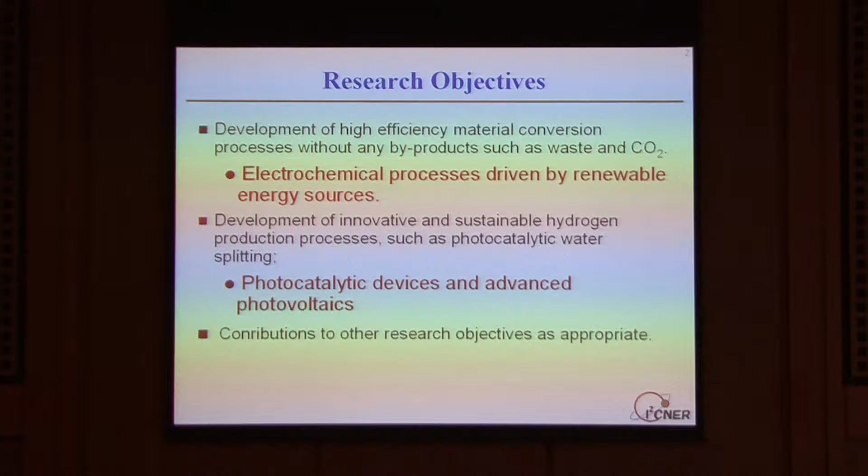In addition, we want to look at ways of hydrogen production, photocatalysis, and that sort of thing. All of these processes require energy input in the form of electrons at high chemical potential, and so that's what a photovoltaic provides. The people that I'll be mentioning today can also contribute in many other areas that you've heard about today, so it's a potential for a lot of collaboration.

In terms of driving photocatalysis, an excellent way to provide electrons at high chemical potential is with a photovoltaic device. In particular, one might imagine a multi-junction photovoltaic. You heard a little bit about that earlier with the two-stage optical absorption, the high-energy photon followed by a low-energy photon absorption. That's typical of a multi-junction photovoltaic where you have a blue absorbing solar cell that's transparent to red light. You put behind it a red absorbing solar cell, and then you put them in series.

It adds the potential of the two cells, and so you get a higher potential out of the whole device. The nice thing about a multi-junction cell is that you can tailor the energy gaps for very high efficiency. The record efficiency for a photovoltaic device is 40% efficient conversion of sunlight to electrical energy. By tailoring the energy gaps and the way that you put those devices together, you can also tailor the net potential that you develop from the anode to the cathode of the multi-junction device. So you can adjust the way that you design the device in great detail for optimized performance with respect to an electrolyzing device.

And then, of course, you need the electrolyzer, which will be discussed in the talk that follows mine. Photovoltaic devices provide sufficient output to split water directly. They're very high efficiency, as I just said. One of the things that you certainly have to worry about is protection of the device from photochemical corrosion in the material, and so one of the big issues will certainly be some sort of a barrier between the device and the electrochemical cell.

It would be interesting to look at things like the nitrides as polycrystals and see if you could adjust the deposition conditions and composition of the materials to passivate grain boundaries in that material system. They're much less susceptible to grain boundary behaviors than the less ionic arsenides, and of course the covalent materials.

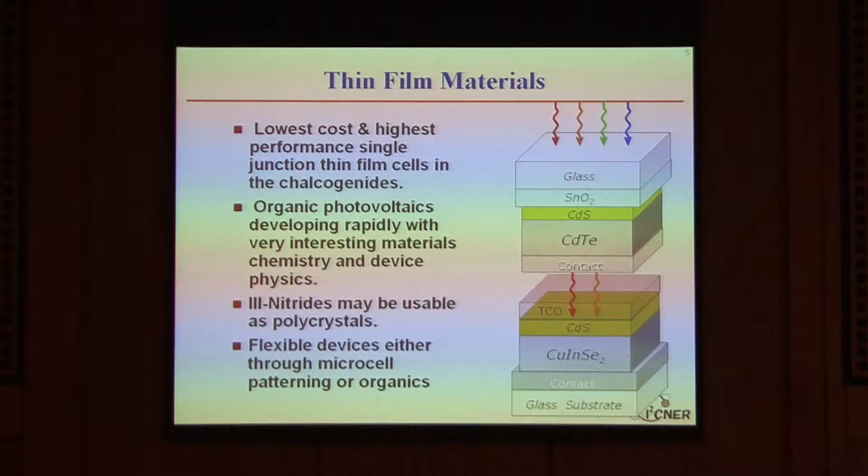Flexible devices are nice for many applications, and you can do this either by using organics, or you could consider, for example, a patterned microcell process such as one of my colleagues, John Rogers, uses, and I'll mention that in more detail in a minute.

So just to consider a few examples of the work that's going on at Illinois, and perhaps you can see as I talk about these how they fit with the work going on here, and how we can make a collaborative team out of the whole structure.

This is a summary of Lane Martin's work in my department. He's working on oxide materials, ferroelectric materials. He's got a radically new concept, I think, for a photovoltaic device, where instead of relying on a heterojunction to separate an electron from a hole, he relies on a polarized ferroelectric material and takes advantage of that built-in polarization to separate the electron from the hole. He can make devices that work, and he's exploring this concept.

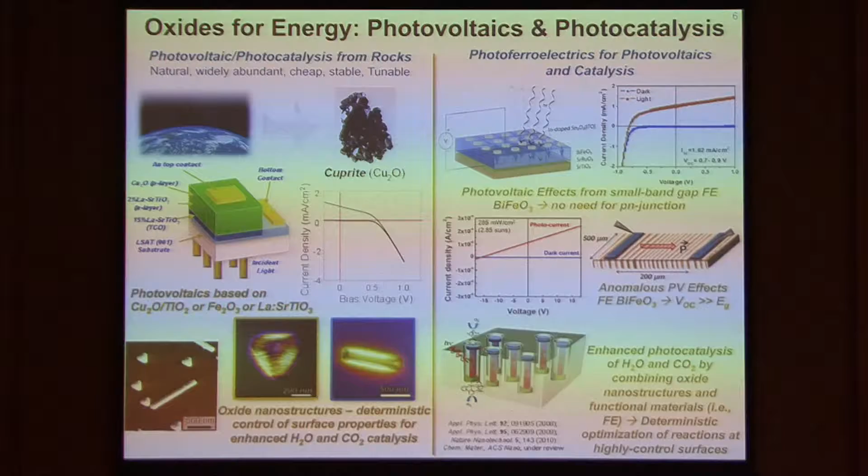One can imagine then going on. These are relatively stable compounds, being oxides, for electrochemical corrosion, and so you could imagine very interesting new novel devices made out of these things. He's making photovoltaic materials as well from the copper oxides, which have been studied for a while, but they're coming back into fashion, and people are looking at new technologies based on the copper oxides.

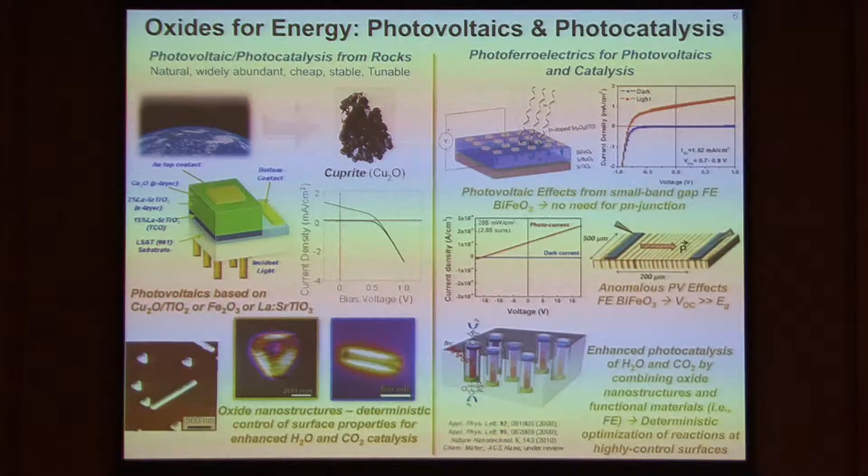I think in particular his work is very exciting, the combination of the copper oxide with things like titanium or iron oxide, or some of the perovskites like lanthanum strontium titanate. So these are exciting opportunities in an inorganic device.

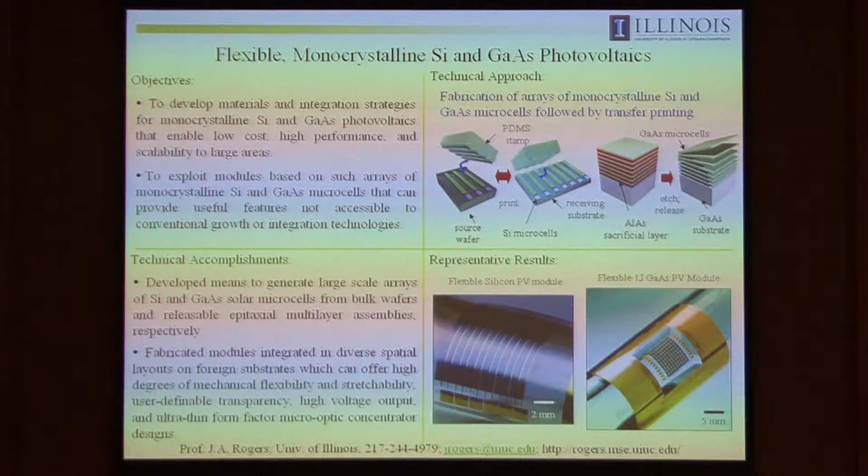My colleague John Rogers, in the same department as I am, material science, is spending a lot of his effort on micro-patterning of solar cells. He has developed technologies by which he can take a high-efficiency device, like a silicon device or a gallium arsenide device, that's normally very hard to process and requires a relatively thick substrate.

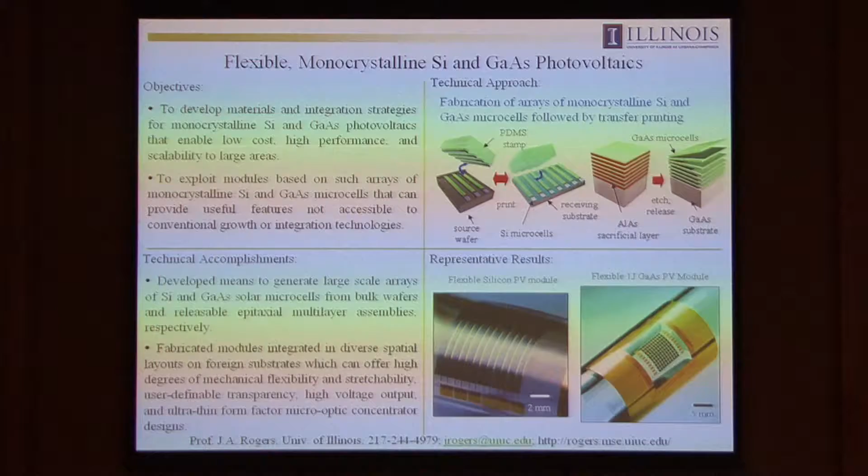And he's found ways of cleaving off thin layers of that material, picking it up, placing it somewhere else, and therefore cutting down greatly on the amount of material used, making a flexible device. This has a lot of applications, both in flexible photovoltaics, but also in much more effective utilization of things like gallium arsenide, with potential to revolutionize the manufacturability and deployment of arsenide-based solar cells. This is the 40% efficient technology.

That's really exciting, something that we can use, again, to drive an electrochemical cell directly.

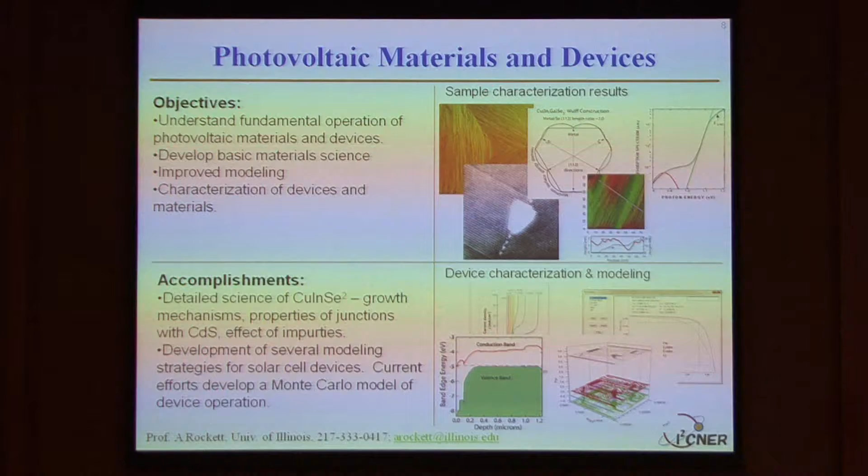There isn't a good model for organic photovoltaics at the moment, or for nanostructured photovoltaics. The model we're developing, based on a two-dimensional grid system and a stochastic model, can handle the very low carrier mobilities and the time-critical series of events in a nanostructured device, especially a multi-exciton or intermediate bandgap structure. So we can provide both modeling and characterization along with inorganic materials and devices.

The University of Illinois, as a collaborator in this project, has a very extensive range of characterization facilities, all the way from optical probes, SIMS instruments, surface scanning probes, and we would love to work with the groups here in terms of supplying material to us, characterizing it, and feeding back to the groups here that are making devices.

When you think about turning this into an artificial photosynthesis process, this is how I view it: you need, in order to make the completed device, to integrate a lot of parts together. You could imagine saying, okay, we need to make a photovoltaic device - that could be organic or inorganic-based, or a little of both. We need an electrochemical cell to go along with it. We need device modeling and simulation to figure out how the rest of the process worked. We need to characterize the materials we make so we know why the device works or doesn't work. And then ultimately we can put it all together and make a completed device.

So in terms of how I perceive a collaboration between Illinois and Kyushu, the work here involves particularly organic materials and devices. At Illinois, we're mostly working on inorganic materials and devices. There's electrochemistry at both organizations, and characterization techniques at both organizations. Most of these are synergistic and complementary, so we can build a team together that I think really will advance the technology, drive this forward, and result in direct photoelectrochemical production of hydrogen.

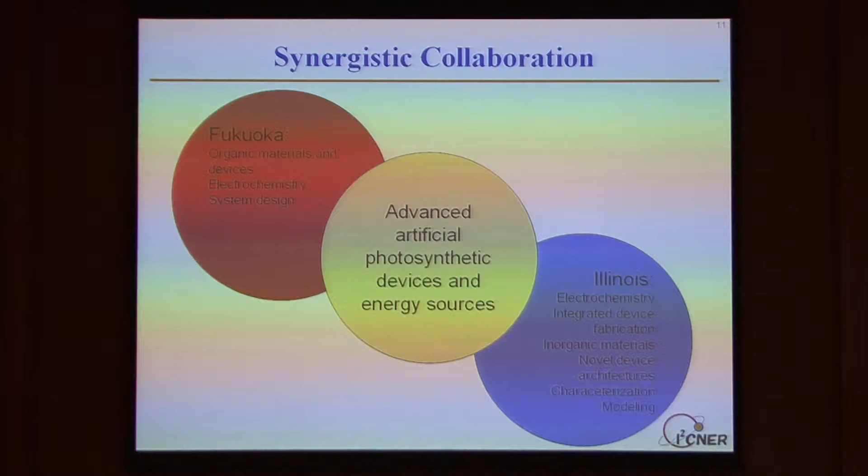Finally, as a vision for the future, one comment I like to make is the best hydrogen storage material I've ever run across is long-chain hydrocarbons. We know, as you've heard from the talks earlier, that we can do electrochemical reduction of carbon dioxide, and in fact you've seen evidence that we can put these two processes into a single electrochemical cell that yields syngas directly in the high-temperature steam reformer, and go directly through Fischer-Tropsch to a long-chain hydrocarbon. So we know we've got all the pieces to go from sunlight or wind or any other form of energy to hydrocarbon hydrogen storage technologies, and we know how to use that in our vehicles today.

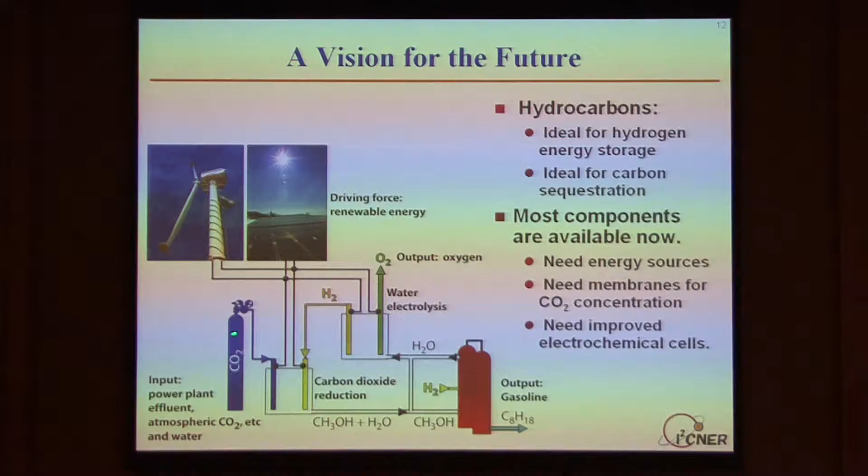So I think really what we're faced with is taking and optimizing all of these little process steps, not the least of which is gathering carbon dioxide from the atmosphere. But we can do all of these parts - we just need to do them better. And then we can store energy in the form of hydrocarbons, which we already know is a fabulous energy storage technology. So with that, I thank you for your attention.

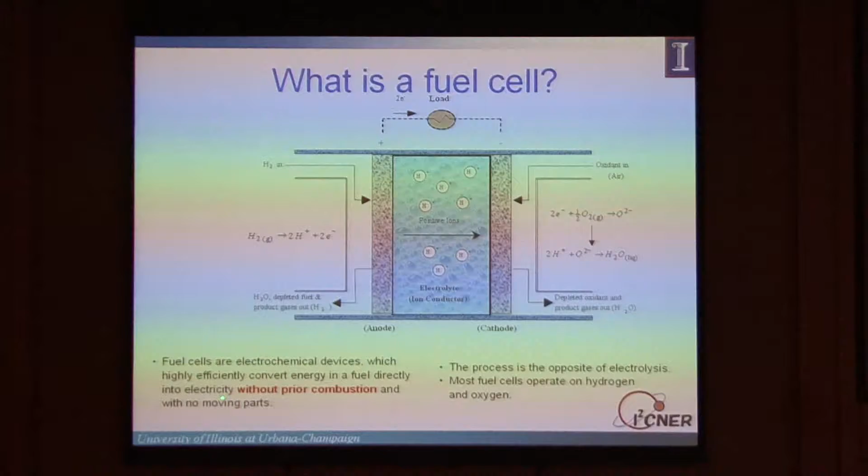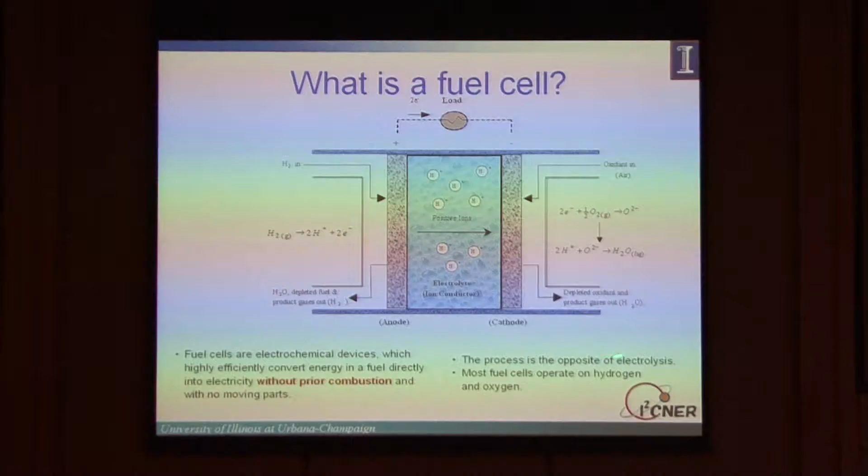Okay, so why use a fuel cell? Well, it's a very efficient electrochemical device. We can turn a fuel directly into electricity without prior combustion and with no moving parts. And as has been mentioned several times today already, this process is the opposite of electrolysis, and we're going to run on hydrogen and oxygen.

This was the component in Apollo 13 that blew up, if you might remember.

All right, the ones we're going to work on are either these PEM fuel cells, which work on hydrogen and are CO2 tolerant, or direct methanol fuel cells, which are a little less popular these days. And then we've also heard some talks today about solid oxide fuel cells. But there are other types, phosphoric acid fuel cells and molten carbonate fuel cells, and these have sort of fallen out of favor these days, although they could come back.

And the areas of application for these, as we saw, range from things like portable electronic equipment to mobile and residential generation to cars and boats — and this is where PEM fuel cells in particular are being talked about — and to distributed power generation, and this is perhaps where a solid oxide fuel cell would be best used.

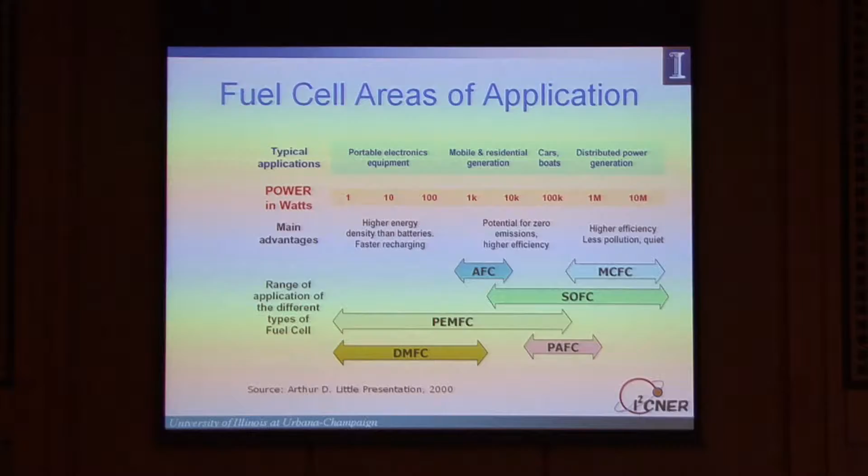Now, the main advantage of the fuel cell — and this is the very important point — is the high thermodynamic efficiency. I can take hydrogen and oxygen, and figure out a way of getting power out of it by simply combining them and flicking a lighter, and presto, you get combustion. But then, of course, you're Carnot cycle limited, and hydrogen is a low temperature burning material, so that Carnot cycle limitation basically means you're not thermodynamically very efficient.

In contrast, this is a chart I took out of Physics Today — it was an article about 10 years ago — showing we can have very high thermodynamic efficiencies with all of these different fuels. You can see right here, after you include the entropic term, we can have thermodynamic efficiencies up to in the mid-80s for hydrogen, and ranging to over 100% because of the entropic term.

We're not creating energy out of nothing. Compared to an internal combustion engine, we have very high efficiencies — the best known way to convert chemical energy of fuel into electricity. A typical Otto cycle engine has thermodynamic efficiencies in the mid-20s, and the best diesel to date only attains about 40%. So it's actually fairly low.

Compared to a battery, we have significantly greater energy density, and it's much faster to recharge or refill.

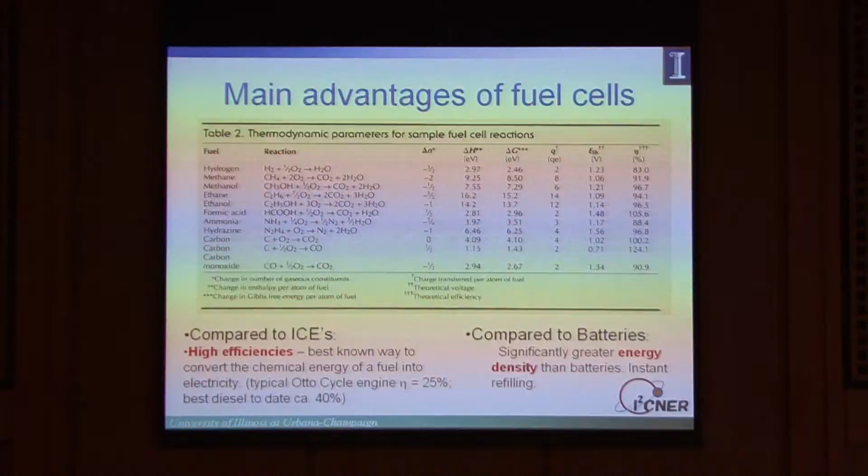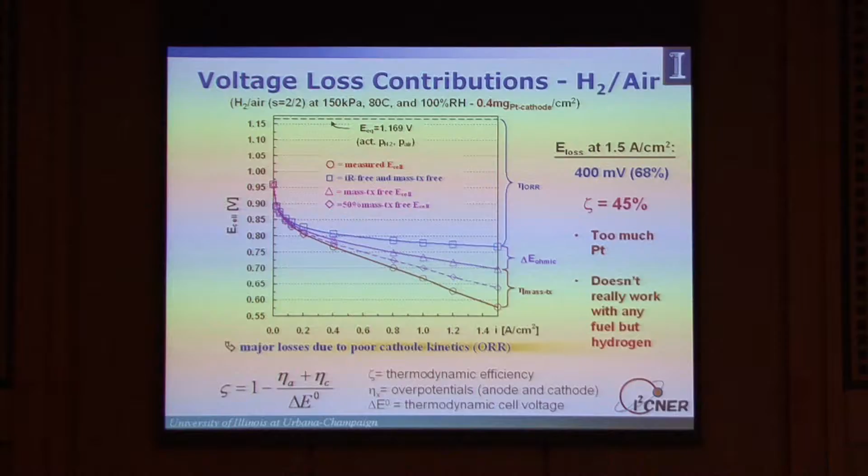Okay, so what we want to do is we want to step back. We want to understand what the mechanism of this oxygen reduction reaction is. And then what we want to do is use this mechanistic understanding to develop a new catalyst that will solve all of our problems and move us on to greater glory.

Okay, so let's see. What do we know about the mechanism of the oxygen reduction reaction? Well, it turns out not too much. This is work by a very smart American electrochemist named Ernie Yeager some years ago. And Yeager, who did not use molecular-based tools, was smart enough to know what he didn't know.

But he proposed perhaps there are 2 platinum sites involved. He couldn't tell whether it was end-on or side-on, what the intermediates were. And let's just say that this was a good guess. So don't copy this down. Please don't. All right, now, so this leads to a whole series of questions.

What's the mechanism of the oxygen reduction reaction on platinum and with other catalysts? What are the intermediates in these reactions? How can we replace platinum with less expensive materials at both the anode and the cathode? How can we reduce the overpotential, which is telling you what's killing you thermodynamically?

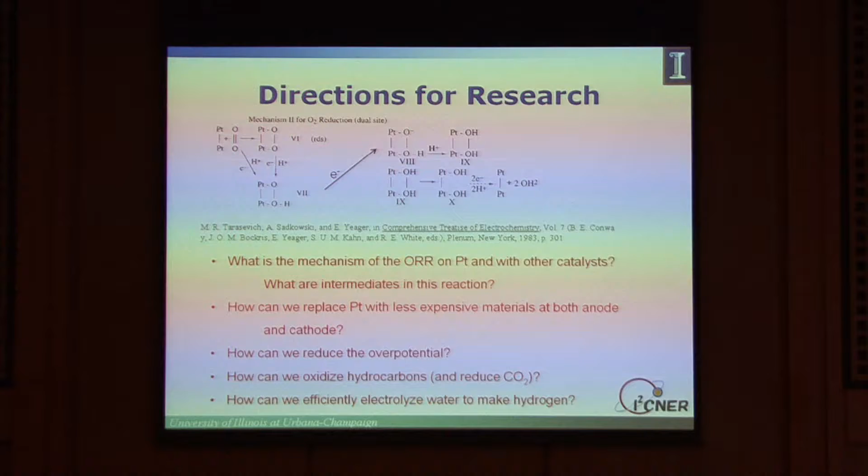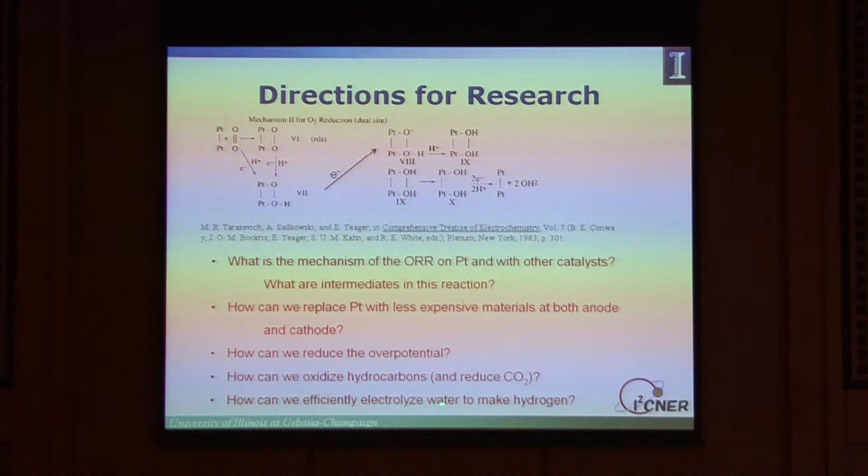How can we oxidize other hydrocarbons? So I think Angus pointed out that storing hydrogen in a hydrocarbon is actually much more efficient than storing it in a hydrogen tank, all right? And reduce CO2. And how can we efficiently electrolyze water to make hydrogen? So all of these things are what we need to do in order to make this work properly. And so I'm going to very quickly just go through some of the things that we've done in this way.

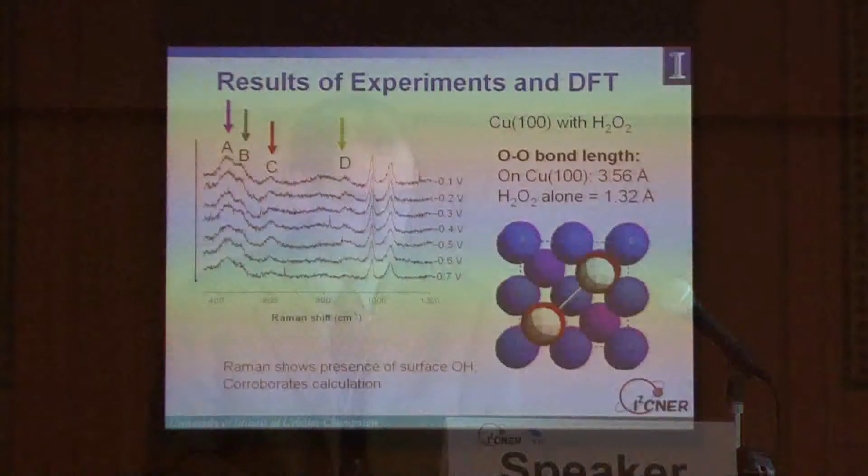Okay, so we've done a lot of mechanistic work. We do vibrational spectroscopy. We do calculations. And I will say that all the work we do show the presence of surface hydroxides, which we believe come from this cleavage at the peroxide level.

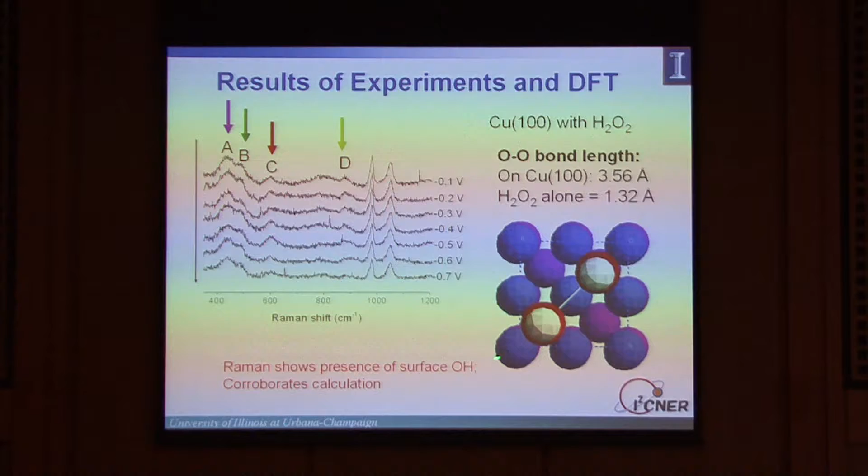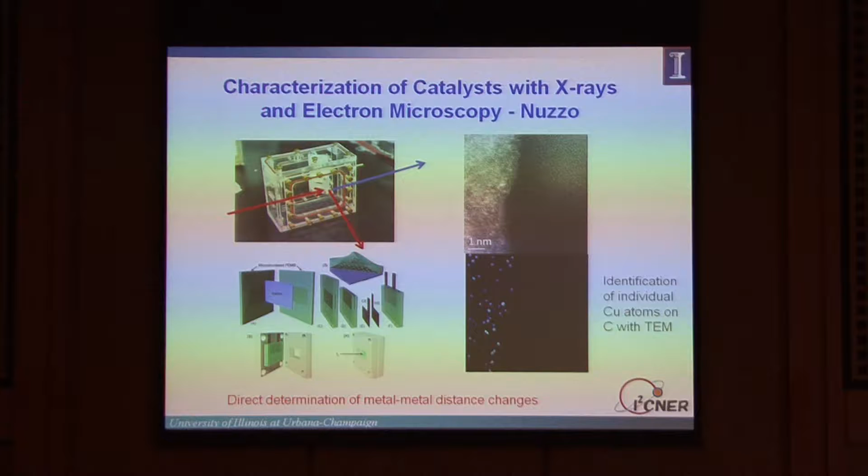All right, don't take notes because we've done X-ray scattering experiments to look at platinum-platinum distances as a function of oxygen presence and of potential. We can do TEM to look at real catalysts on surfaces. These are individual copper atoms on a carbon electrode surface. And from this, we can come up with a series of mechanistic ideas.

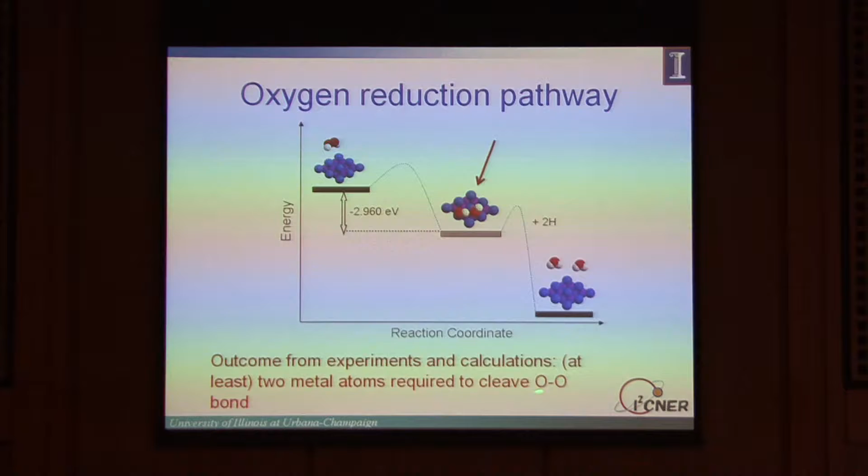And the outcome from all of these experiments and calculations is to show that at least 2 metal atoms are required to cleave the oxygen-oxygen bond. So that's one thing that we know we want to do.

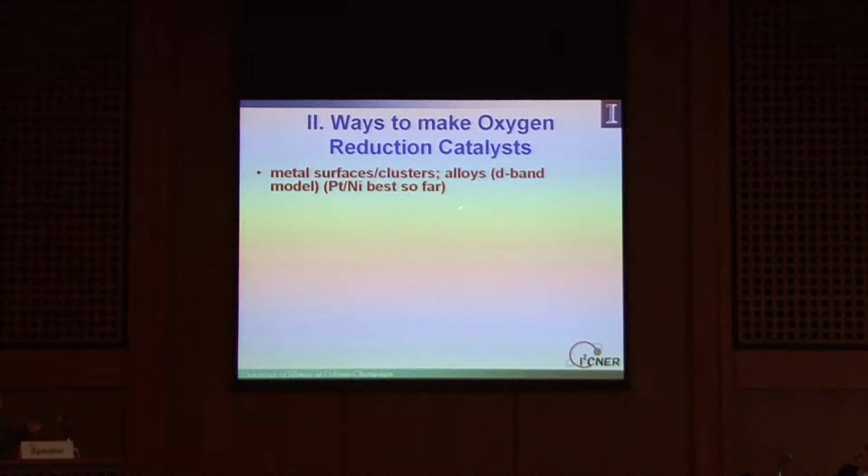Okay, so with this idea, how can we make new oxygen reduction reaction catalysts? Several ways. One way is by making metal surfaces or clusters or using alloys. The so-called D-band model, which is a consequence of something called the principle of Sabatier, important in catalysis, is often used. Platinum nickel is the best so far.

We can heat treat carbons. All right, there's a lot of work this way. Dodolet is perhaps the most known for this. You can pyrolyze a carbon at 850 C and actually get something that works fairly well if you include a metal.

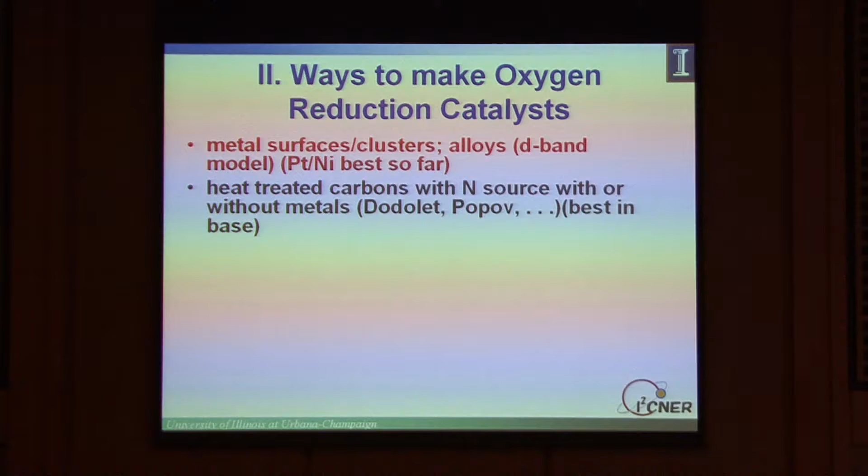You can make other polymers with metals. Cobalt polypyrrole is the best exemplar right here. You can do combinatorics with all of these, but we won't talk about that. You can work in the basic electrochemical environment, forbidden here on Earth because of the formation of carbonates in the electrolyte, which lower your conductivity. But things like the zinc air battery or gold in base work fairly well. We don't fully understand why.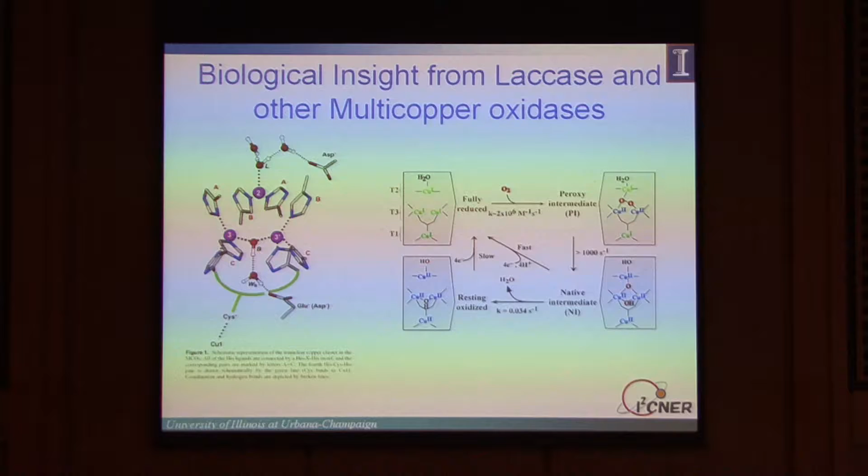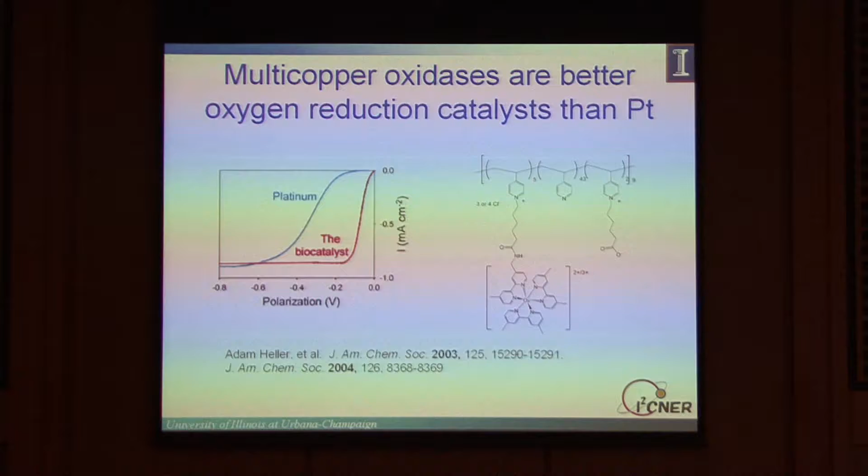Finally, we can look to what nature tells us, and it's this point I want to emphasize. It turns out nature has solved the oxygen reduction reaction problem. In fact, right out there on the ground, there's an enzyme called laccase, which reduces oxygen at near thermodynamic potentials, and uses that energy to oxidize various things. What it features is a 3-copper active site, and a series of intermediates not dissimilar from what I glanced over before. The interesting thing is many people have shown this catalytic material is substantially better than platinum. So all we have to do is figure out how nature did it, and then we're better than platinum, and we solve this problem.

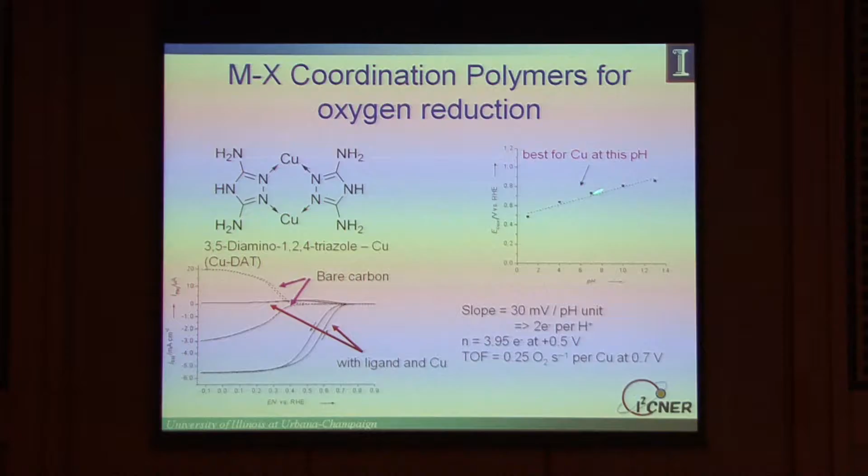We've done some of that. We have a material based on this 3,5-diamino-1,2,4-triazole, which forms a binuclear copper site. We've shown that this catalyst is the best catalyst for copper at intermediate and higher pHs. We've been spending a lot of time working on that.

At the same time, my colleague Tom Rauchfuss has been working on the anode reaction—recall that's where you're oxidizing hydrogen. He has a biomimetic catalyst based on these iron-nickel hydrogenases. He's shown that he can get very efficient oxidation of hydrogen with only a small overpotential. In fact, the best overpotential for hydrogen on this material.

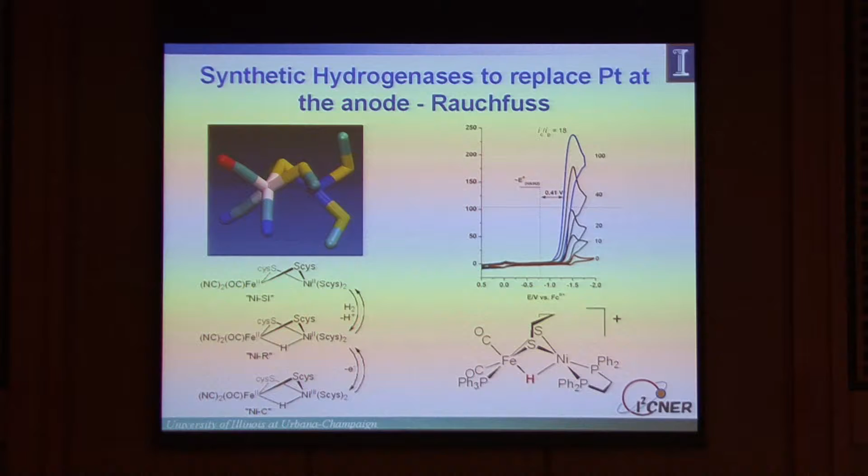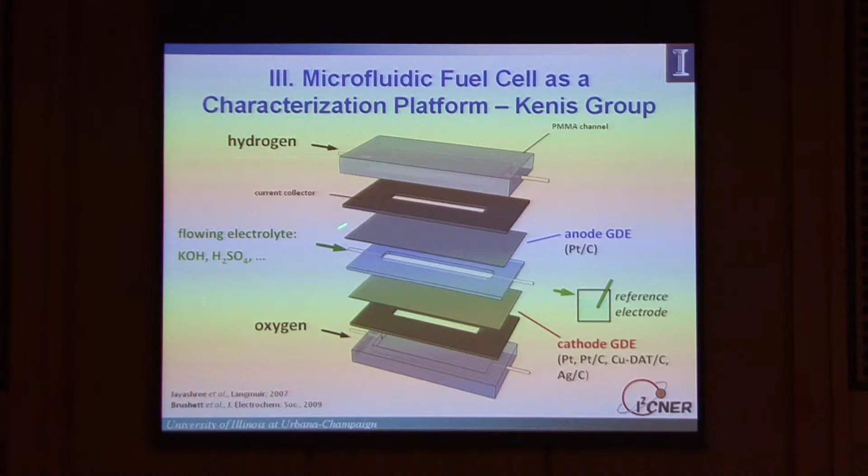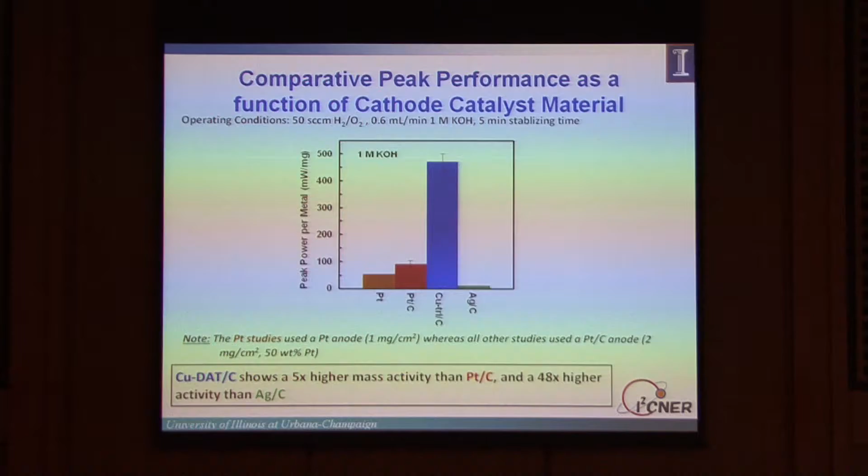So now what we can do is test these materials using a microfluidic platform developed by my colleague Paul Kenis. He can do both the hydrogen side and the oxygen side simultaneously with a reference electrode, and he has tested our diaminotriazole catalyst. What he's shown is that in base, this catalyst is about 5 times better, or 5 times higher mass activity, than platinum-carbon material, and better than the more traditional silver-carbon material that was used, for example, in the alkaline fuel cell in the Apollo program.

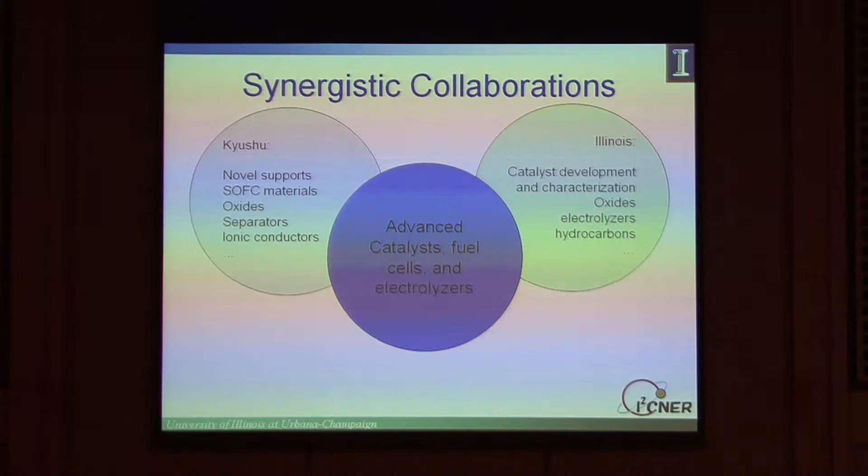So with this one example, I can give you some ideas of the kinds of synergistic collaborations we might engage in between Kyushu University and the University of Illinois. Here we've seen talks about novel supports, solid oxide fuel cell materials, oxides, separators, and ionic conductors. At Illinois, I think we're fairly good in catalyst development and characterization, in oxides, in electrolyzers, and in work looking at oxidation of hydrocarbons. Taken together, I think what we can do is make advanced catalysts, advanced fuel cells, and advanced electrolyzers.

I'd like to close with a final thought: this is a great time to be involved in electrochemical work because it is charge transfer at interfaces. I think that's the major theme we've seen in all of this work. Charge transfer at interfaces is what's going to make us have a better energy future. Thank you very much.

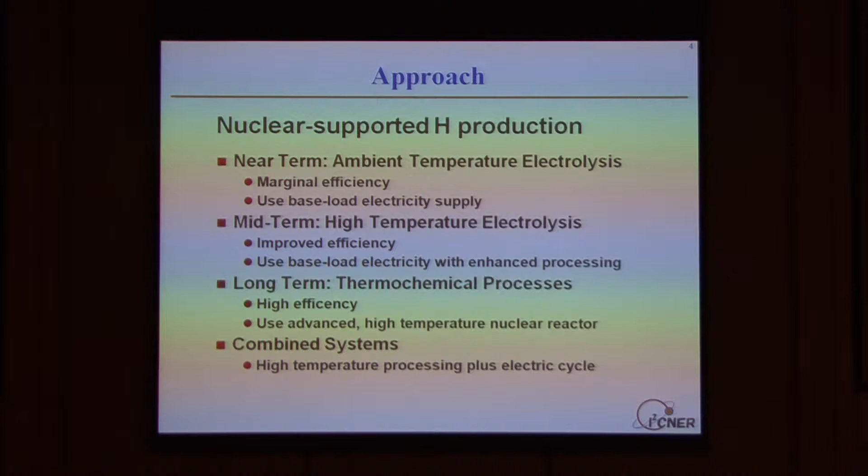And so I think this is the goal of nuclear. It's the goal also of several forms of renewables, particularly hydroelectricity and other things. And I think nuclear has a place to play in this area right now. So the very near-term things that nuclear can do, we heard about, are providing electricity for doing ambient or lower temperature electrolysis. Medium term, we can go to higher temperature electrolysis, which improves efficiency, as we heard earlier. And then longer term, though this is ongoing now, there are a number of thermochemical processes, one in particular, which are being developed to do much higher efficiency conversion of water or splitting of water into hydrogen and oxygen. And there are some very long-term goals, which I'll remind you of. These are concepts that were here 10 years ago, at least at the end.

And so this gives you an idea about where the primary sources are. Again, this is like the first chart. You'll notice that, again, these are the primary sources in the U.S. The first primary source in terms of quads produced that's non-fossil is nuclear. And this is a very large fraction. If you add all of these things together, this accounts for roughly 70% of the U.S. energy production. So this is the indigenous energy portfolio of the U.S.

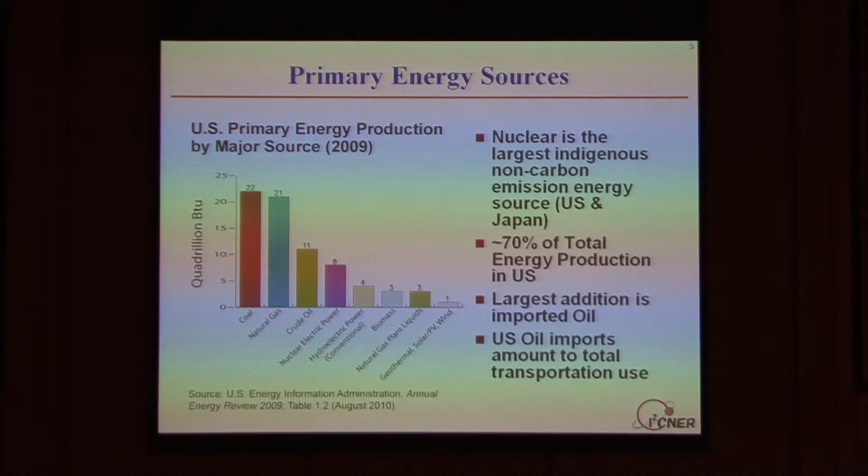The other 30% is imported, and that roughly corresponds to the transportation costs for energy. So about 25 to 30% of the energy used in the U.S. is for transportation. If you look at oil imports, that's essentially all the oil we import. If we had no transportation sector, we'd have very little need to import oil. Alternately, all of the imported oil supports the transportation sector.

Looking at where carbon is produced and where the major footprints are, this is a very recent report done by CRIEPI here in Japan, dated 2009. It shows fuel combustion, carbon emission, and the life cycle of building the infrastructure for those energy systems. You can see coal, oil, liquefied natural gas, all the way down to nuclear, geothermal, and hydro are the least energy or carbon intensive of any of the energies. This is true for nuclear because it's a lot of energy for very little carbon footprint in the construction process.

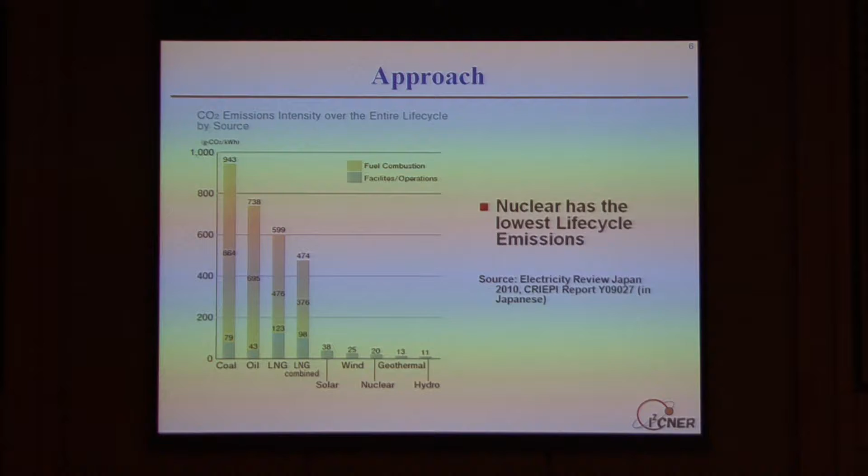So this makes a strong case that nuclear should be a big part of the solution. Another strength of nuclear is base load electricity production. Here's a schematic chart, taken from the Japan Electricity Review from last year. Coal and nuclear, particularly hydroelectricity, are very good for base loading. People often handle peak loading with more easily burnable hydrocarbons, particularly natural gas in the U.S.

This shows electricity prices on a hot day in August in the U.S. and on a cold day just a month ago—so the start of this year, 2011, not 2001. The peak load in summer is very high, so there's excess capacity in winter when loads aren't nearly as high. This is Chicago, which is 80% nuclear electric. Notice that on this cold day, if you got up early enough or stayed up late enough, the company would actually pay you to take electricity from them—there are negative prices here, and this isn't uncommon in this scenario.

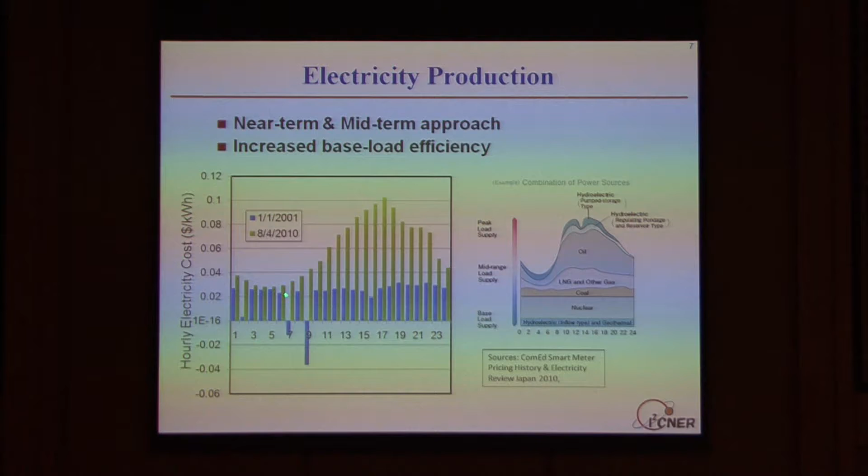Because when you have mainly baseload power, you have to get rid of excess electricity—it's more costly to turn plants up and down than to just give the energy away. I think this makes a good argument for using this differential capacity, as well as the late night, early morning low-priced electricity, to manufacture hydrogen.

This is a comparison of 2008 figures and projections for 2013 and 2018 for Japan's electric production. The nuclear fraction is proposed to increase significantly, from around 26% to maybe 40%. I've replotted these numbers here—Japan 2018 alongside Illinois in 2009, last year—and you see that even Illinois is half nuclear electric.

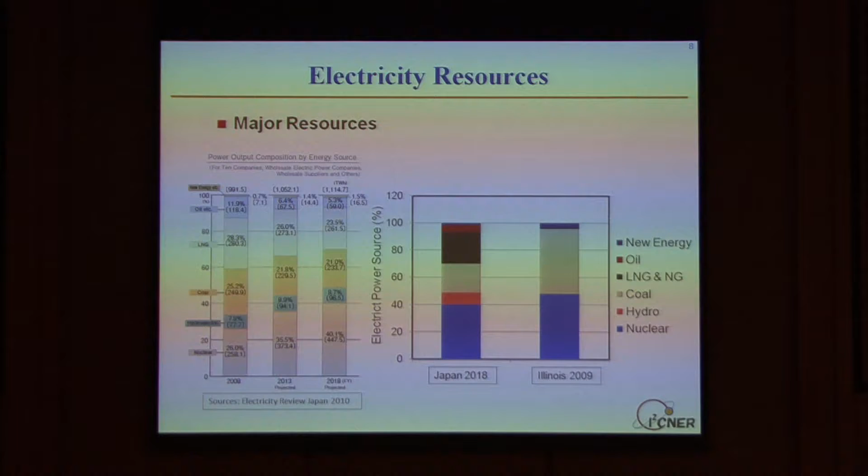This makes a strong case for major support of hydrogen production using, at least in the near term, electrolysis from nuclear energy. The next step, which is evolving both in Japan and the U.S., is to look at a much higher temperature system where you could do thermochemical processing to produce hydrogen much more efficiently.

This is a conceptual picture of what is now called in the US the next generation nuclear plant. It's a very high temperature gas-cooled reactor connected to an electric supply system as well as, in this case, a couple of thermochemical supply systems.

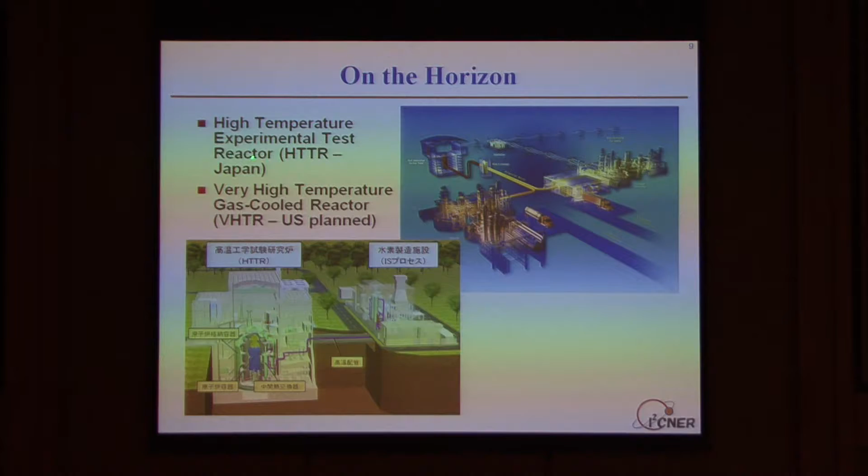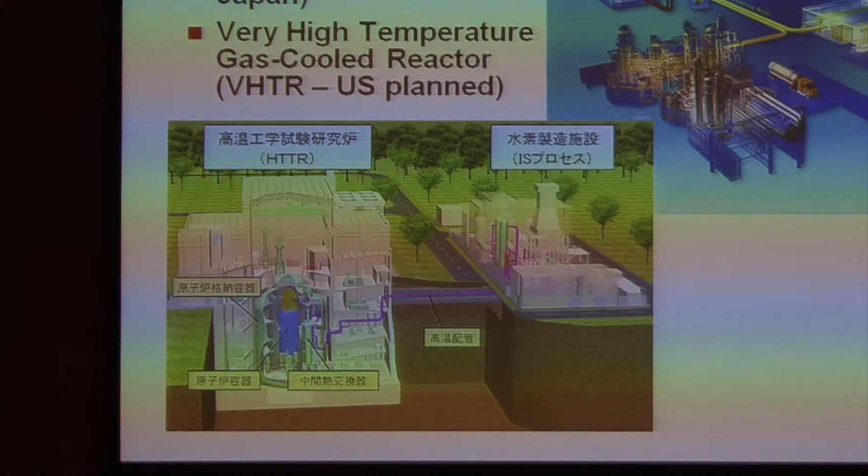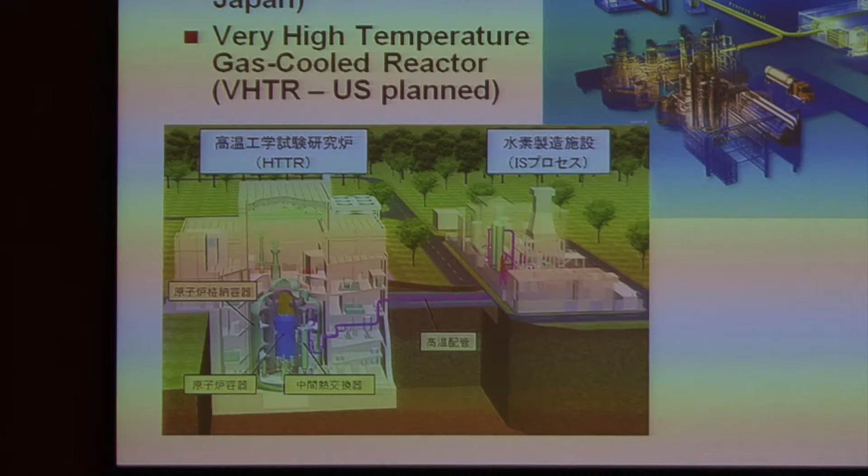This is an existing reactor in Japan, the High Temperature Engineering Test Reactor, HTTR for short, which is currently in the process of building a thermochemical processing plant for hydrogen production. This particular reactor reached an outlet temperature of 950°C six or seven years ago. So it has been operating at a high enough temperature to enable very high temperature electrolysis or to drive thermochemical reactions, and this has already been done.

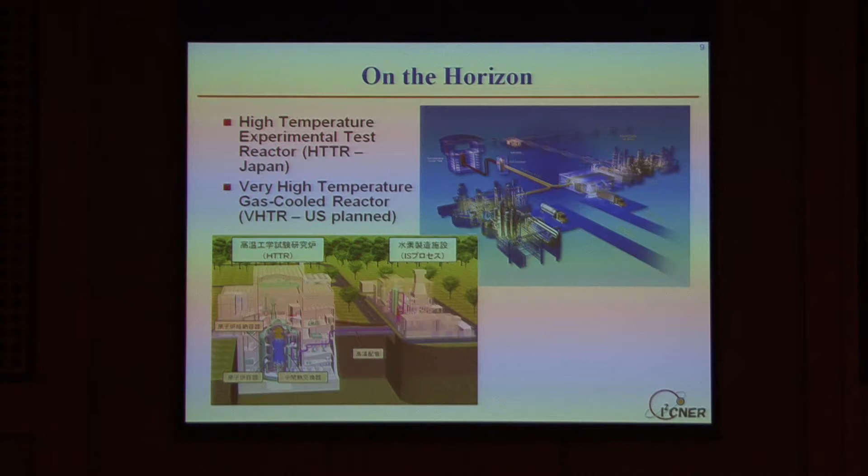The sulfur iodide plant, IS as shown in the script, is being built now and this system should be operational by 2015, also on the timeline as a demonstration.

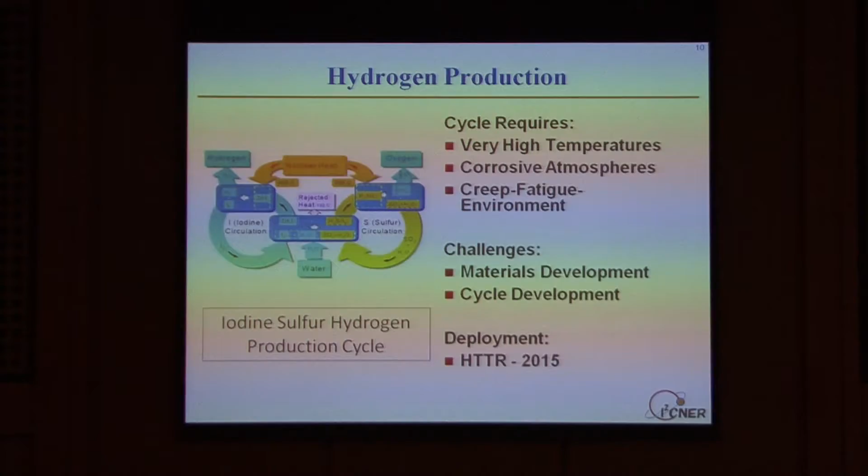There are many cycles for producing hydrogen. This is the so-called iodine sulfur cycle, being pursued both in the US and here, using high temperature nuclear heat up to 900 C and a low end at 400 or 500 C, maybe even lower. There are two cycles which produce hydrogen at the low end and oxygen at the high end.

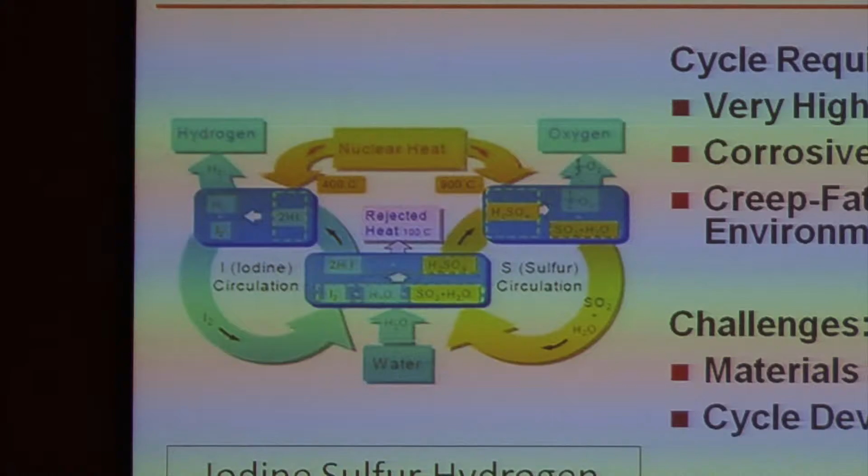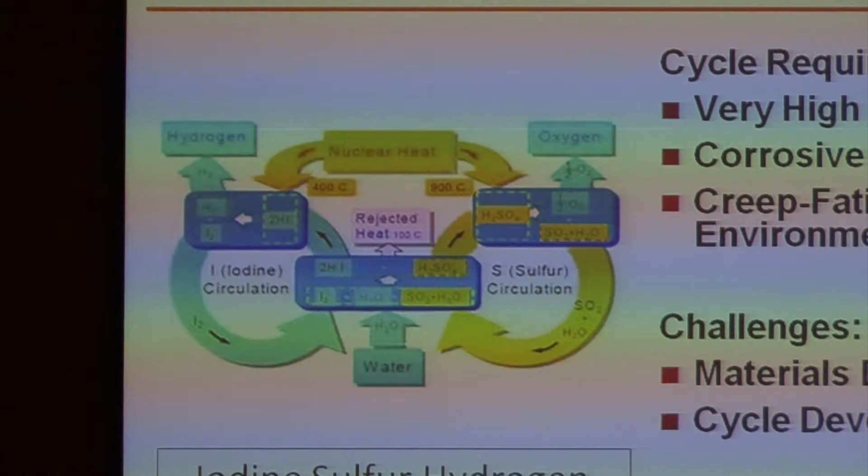This would be an efficient way to do it. Calculations of the efficiency of the system for hydrogen production could exceed 50 or 60%, converting thermal energy to hydrogen production.

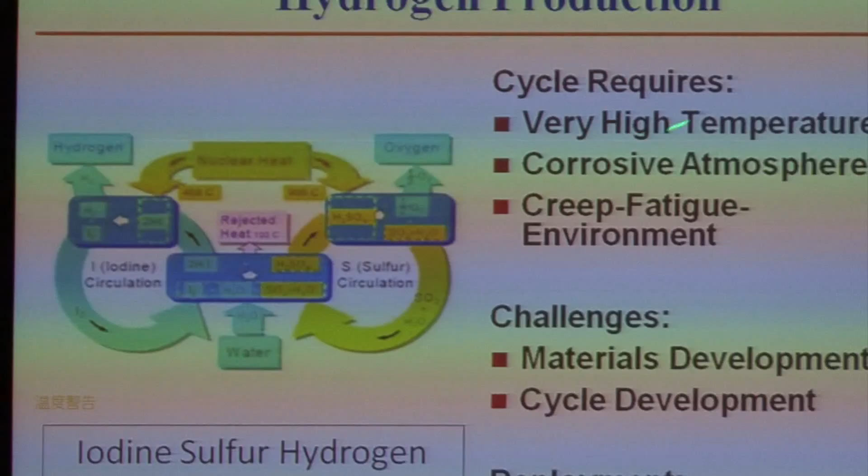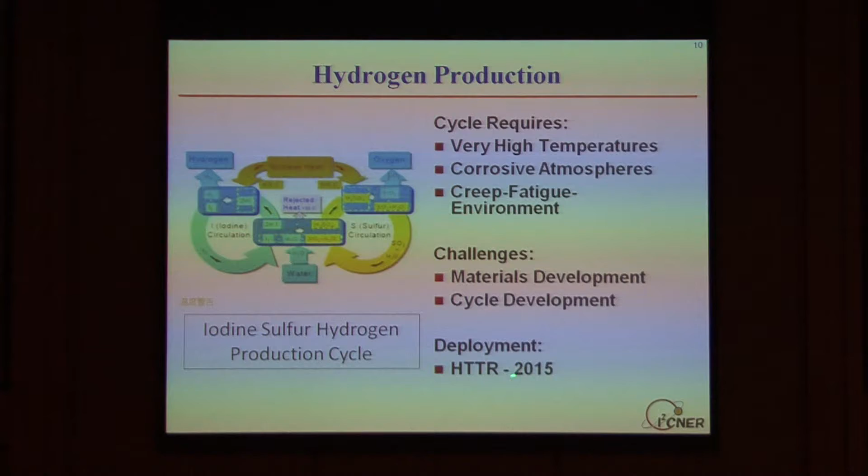The problem with this system is that the cycle requires very high temperatures, corrosive atmospheres, and other conditions very difficult for materials to withstand, different from the lower temperature hydrogen and materials issues. Materials development is a big issue, and this particular cycle hasn't been proven yet on a large scale. This still has to be done, but it's under development now and will be deployed by 2015 at HTTR here in Japan.

There are a lot of issues with corrosion in these materials, and with materials fabrication and internal degradation under loading conditions. We've developed techniques to look at bulk changes in properties at very high temperatures using synchrotron radiation sources, very high energy X-rays which can penetrate and tell us about the deformation characteristics of the materials.

Before I started at the University of Illinois, I worked for General Electric, and basically these are the same problems, now 30 years ago, that we were working on at GE: a very high temperature gas-cooled reactor, primarily in the US for efficient electricity production. Japan's program at the time was also a hydrogen production program, so we're 30 years on and still trying to do that, not for transportation applications but for steelmaking, for reducing iron ore, seen as a major energy and cost motivator for the steel industry in Japan at the time.

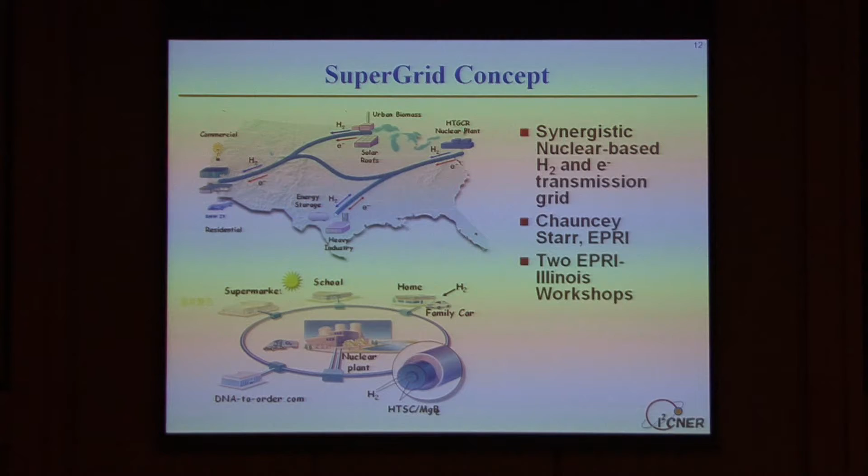So in summary, I think the major issue with nuclear is that it has some very near-term applications. It can already be important for producing hydrogen with very low carbon footprint. In the longer term, there are much higher efficiency applications that can be developed and are being developed. And in the very long term, there are potentials for superconductivity and transport issues related to liquid hydrogen that people haven't started to address yet. In the meantime, there are a number of major R&D issues that need to be addressed. So I'll stop there. Thank you.